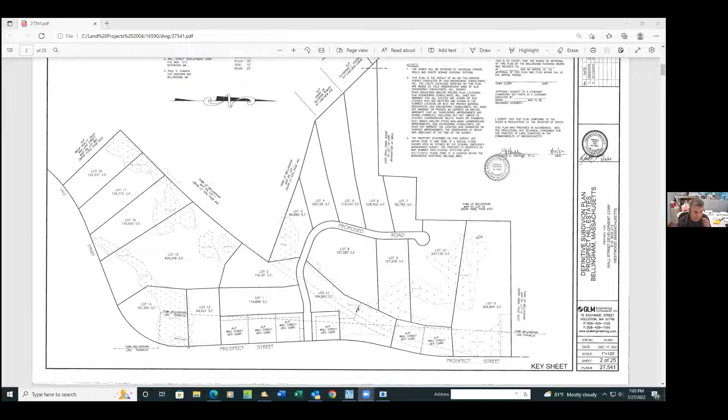So the other things that we did change, I'm just going to share my screen. Sure, if you don't... I've got so many screens open right now. Okay, everyone see that? Just the overview of the site. Yes. Okay, so I'm going to scroll down.

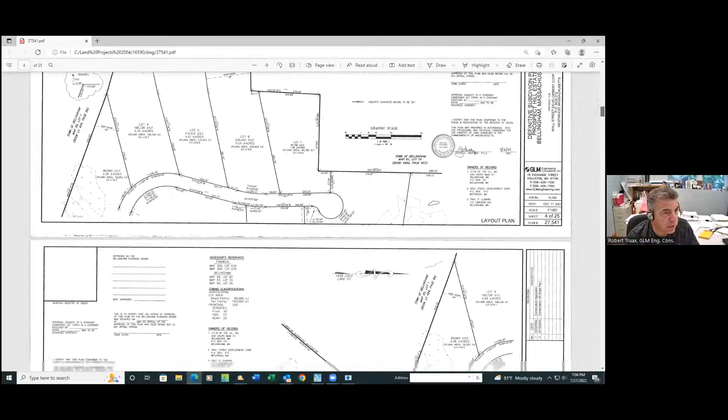Paul McManus has been out to the site, and I'm going to let him speak when I'm done. He's done some reflagging, and one area that we did not represent, I'm going to go to the larger scale plans. So we gave you some existing condition plans in this revision, at 40 scale. You can see here, this is the wetland area in the middle. The roadway goes through this existing cart path once we get done.

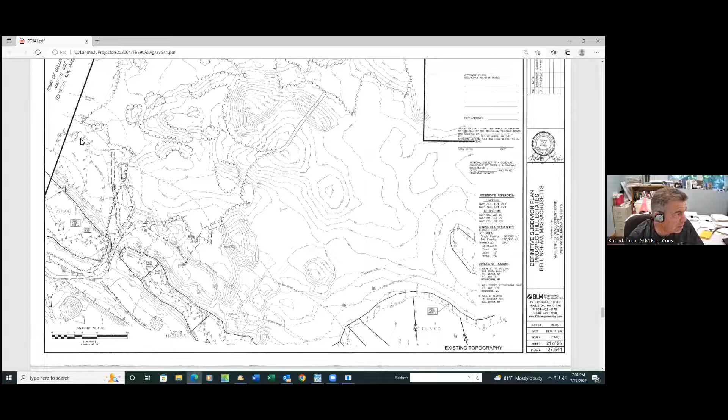So there's been a reflagging of the riverbank by Paul McManus. And there's also been, let me go this way, an isolated wetland on the other side that was not identified in the first filing. As you can see, this would show up on lot 3. And within that isolated wetland, he identified a vernal pool area, which shows up when you get into the lotting layout.

You get into this lot 3 area, and you can see this vernal pool. Pretty much we took the house location off of lot 3. That would no longer be buildable under the local bylaw for uplands. This is just a 40 scale, showing the drainage basins being pulled back outside the 50-foot buffers. That's pretty much an overview of the changes. It really pertained to the drainage system and the upland areas.

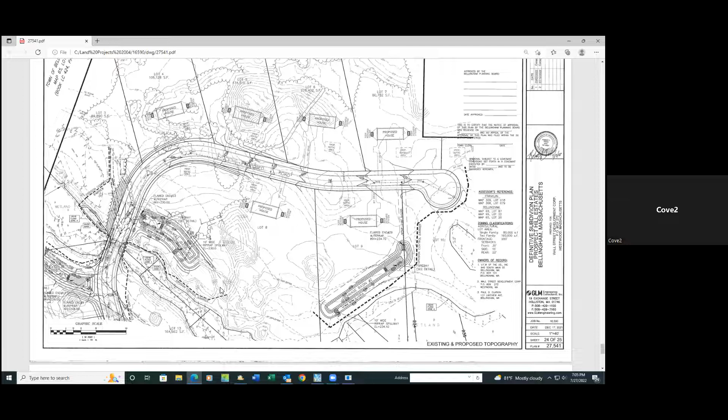Okay Rob, I have several observations. Drainage basin number 2: the basin bottom is exactly 50 feet from the resource area line, but grading is within the 25 to 50-foot limited disturbance zone. So that's one thing.

The second thing is basin number 1. When we were out in the field, I very clearly suggested that basin be moved out of the inner riparian zone. As everybody well knows, and Paul will confirm, if there's a viable alternative, there's no need to put a drainage structure in the inner riparian zone. In the outer riparian zone, it is acceptable. We talked about it in the field, and the inner riparian zone goes right through the basin.

But before we even get to that point, I'd like to speak about the alternative analysis and the comments that DEP made, because the commission is going to have to make a decision relative to the crossing. Do you have your alternatives available, Rob? I didn't prepare the alternative. Does Paul have them? Who prepared the alternatives analysis? Did Paul provide them?

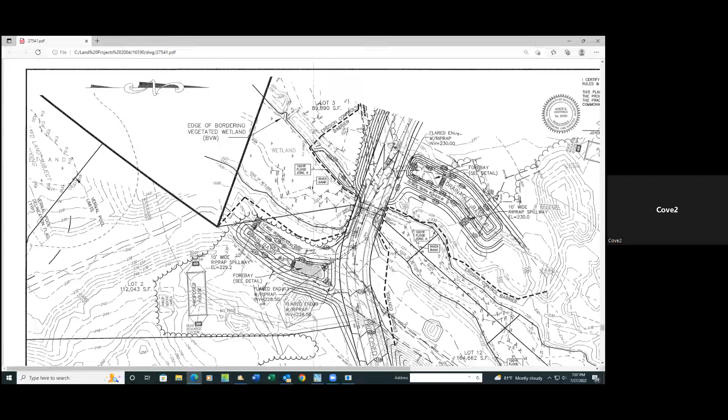I prepared them, Mr. Chairman. I'm sorry, Lou Petrosi, I prepared the alternatives analysis. Okay, so do you have alternative one available? I do not. Let me see... I'm sure everyone here is familiar with the DEP file number issuance document, and they talk about the use of the two-entrance cul-de-sac design alternative, which negates the need for the wetland crossing.

Now, one of the things that I notice is that the bank has been reflagged. And the reason the bank has been reflagged is because, at your direction, the resource area was altered by removal of an impediment to an old drainage structure. That's a separate issue, but I think the commission would consider that an unpermitted alteration by lowering the water level. Well, we would disagree, Mr. Chairman. I'm sorry? We would disagree with that opinion.

On what grounds? It's an existing culvert that was clogged and causing flooding onto the property. Was it clogged recently? It's been clogged for a very long time, so it was an existing condition. We don't, Mr. Chairman, I don't want to argue the point at this point.

Well, it's a clogged culvert. If you don't want to recognize it as a clogged culvert and you think it's an unauthorized activity, we can do that exercise if you want. But in our opinion, the culvert was clogged. It was causing a backup of water onto the upland portion of the property, and it was removed. The obstruction was removed, and the water is flowing freely as it should have been.

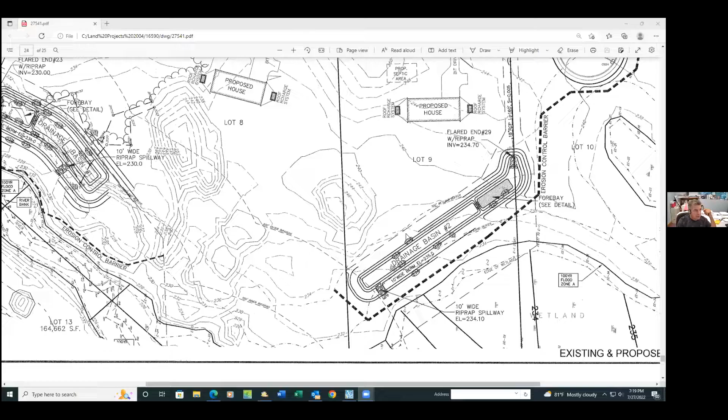Are you putting it back up, Rob? I will, yeah, hold on. Okay, I'm gonna zoom in on it. Right, there you go. So the basin bottom is exactly 50 feet, but I think the 50-foot buffer zone is into the grading. So the 50-foot buffer goes right to the top elevation right here.

See it? Oh my God. So the external. So it's in the berm. Right. It's in the berm, absolutely. Right. And so in order not to get into mitigation for alterations to the 25 to 50-foot limited disturbance zone, you could just shift that portion of the basin, the grading outside the 50, and you'd be okay.

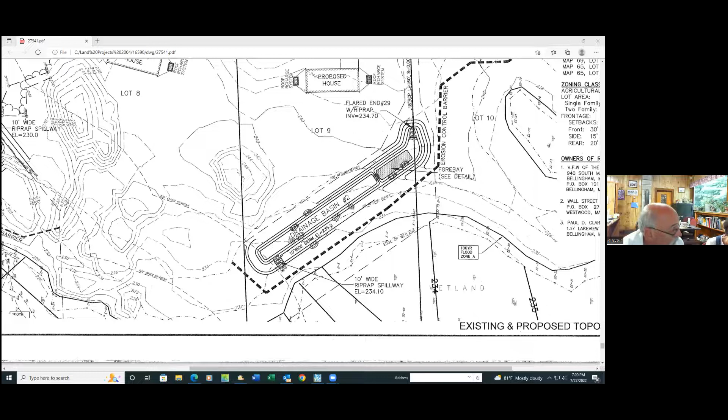Oh, that's under the local bylaw? Yes, it is. There's a 25-foot no disturb zone, and then there's the 25 to 50-foot limited disturbance zone for which mitigation is required. Okay, and yeah, I can probably shift that. Simple enough. If you do that, then you're okay.

In basin one, when we were out in the field, we talked about the fact that you have room to move that basin entirely out of the inner riparian zone. And there it is, right there. Yeah, I'm looking at it, I'm trying to find it through the base with a lot of lines. So it goes right here. You moved it so that the basin bottom was 50 feet away from the resource area, but it's still within the inner riparian zone. And it has to be in the outer riparian zone, if we go that route.

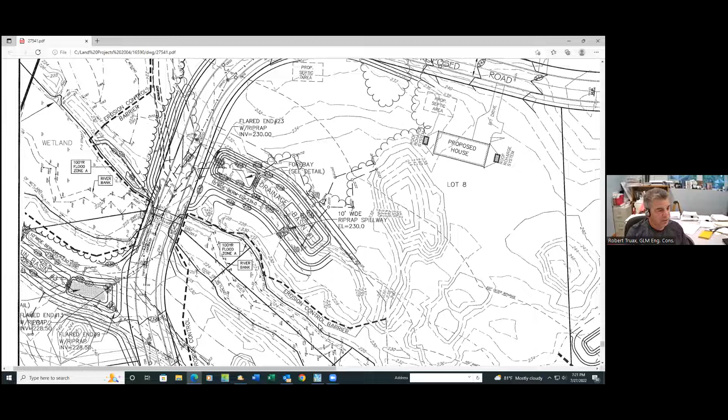Okay. Well, we can look at that option. I don't recall taking it out of the 100-foot. I just recall coming out of the 50. I know we had some conversations about it. I just didn't remember that. I'm sorry. Well, you know, those conversations are in the field. They're not part of the public record. Yeah, I did know, I just didn't remember it. I probably would have pushed it over had I remembered.

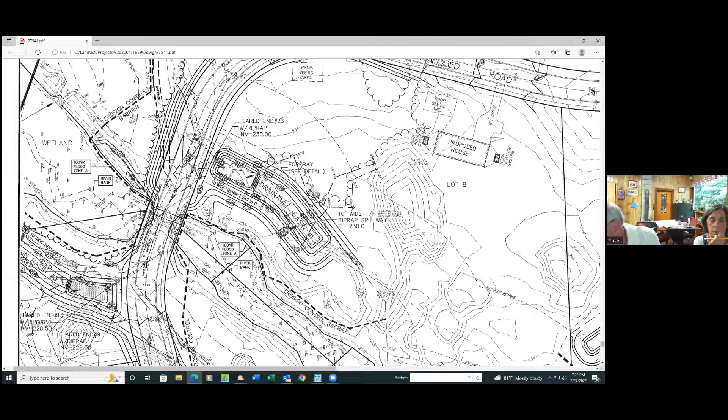Okay. I think those are just the commission's observations. Obviously, we'll have to wait and see what the result of your evaluation is. And we will have our environmental peer reviewer present at the next continuation. And we can further discuss what we saw at the crossing site and the removal of that impediment.

Mr. Chairman, I have one question. Sure. I don't know if the commission received my letter earlier yesterday regarding the stormwater requirements for 4 feet of separation from the bottom of the basin to high groundwater. Yes. It seems to me, based on the regulations, that we're entitled to the exemption that's provided in that portion of the regulations. Can you explain what your position is relative to that? Certainly.

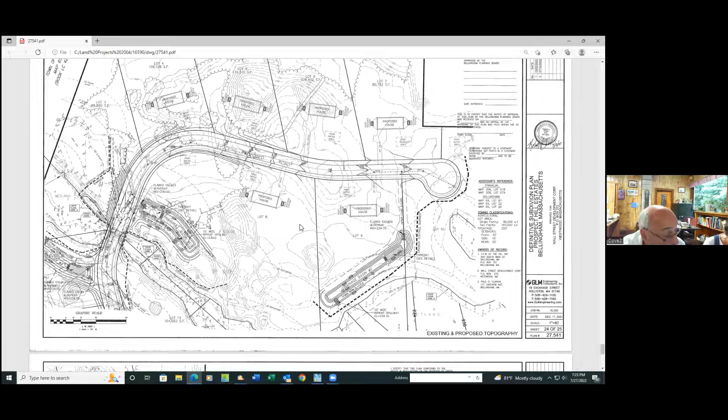When the regulations were promulgated, the commission's consideration was that smaller, denser subdivisions created more concentrated water. And when lots were developed that were over 2 acres in size, that water was easily infiltrated on the individual lots, and that more closely approximated groundwater recharge similarities to pre-development conditions. I'm sure Paul will agree with us. So we put in that exemption in anticipation that if someone wanted to create a subdivision with larger lots, they wouldn't have to deal with the 4-foot separation to groundwater in the water resource district.

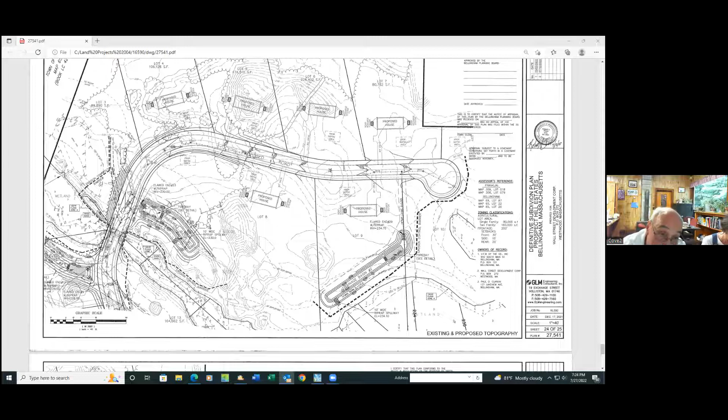So I see this subdivision as being exempt from the 4-foot separation requirement, and we're only required to have 2 feet of separation. Would you agree with that position? I think that's what I just said. Okay, so the design that Rob has proposed with 4 feet of separation is probably not required in this subdivision. And that may allow him some wiggle room if we get to the point where we need to shift the basin.

Well, we are going to need to shift the basin. It may give him a little more wiggle room to do that if we get there. Okay, yeah, so we're on the same page then, basically, on that particular issue. Okay, thank you.

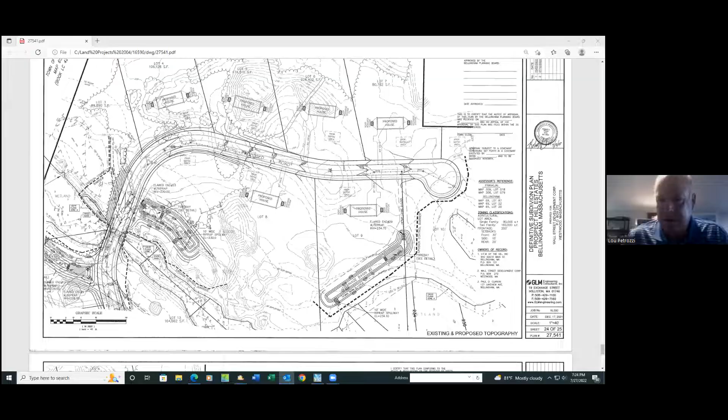Paul, do you have any comments? Well, no, I'm going to ask if there are any questions or comments from the commission on this. Okay, Mr. Chair, I have a question on the stormwater report, just a clarification. Let me call it up, hang on a second. So page 4, and then again on page 5, and I didn't get through all 201 pages. I just have too many other things going on in my life to read through it all yet, but they use the same term. I'm just not familiar with it.

The section talking about the existing conditions overview on page 3 refers to the existing site being divided into 11 existing watershed subcatchment areas to provide a comprehensive review of surface flows to the surrounding area. Then this is the section I'm questioning: see the attached pre-development subcatchment area plan for delineations with associated reaches, ponds, and design point links. And that term reaches is used in the next page too. What is a drainage reaches, drainage recharge basin, or a reaches, comma, ponds design point?

What's a reaches? Anybody else see what I'm talking about, or is that a typo? Is it a term I'm just not familiar with? REACHES. It's used at least twice in those 2 pages. Like I said, I didn't read through the whole thing. Essentially, he's asking what a reach is. A reach is an area that's close to a design point that accepts flow from another area. I think Rob will.

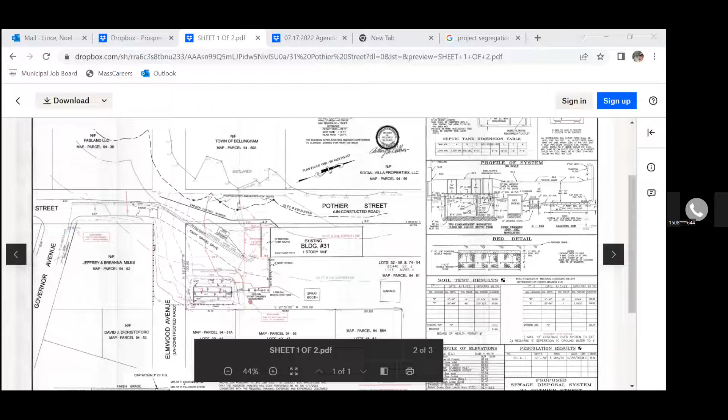Of course, we have revised dates on the plans. The offset to the recharge area is about 52 feet. The new recharge area, it's roughly in the same place, it's just a little bigger. Excuse me, Paul. You didn't distribute it, did you? I did. Oh, okay. Does anyone have availability to put that plan up on the screen? Yeah, I'm working on it right now. 1 second. Thank you, Noel. I didn't mean to interrupt you, Paul. It'd just be easier if we can see what you're talking about. He won't be able to see it, but it'll make it easier for the commission. Yeah, no, I fully understand. Okay, very good. Thank you.

Thank you, Noel. I was trying to do that with my cursor and it wasn't working. All right. So again, the only changes on the actual plan itself: the addition's the same, the tear down section's the same, the septic system's the same. The only thing that's actually changed is the new recharge area that Dan designed and just moving the water line a little bit away from it, which goes a little further away from the wetlands. And that's the only changes to the plan other than, of course, the revision date. The package you got from Dan has all the drainage information, the checklist that DEP wanted is in there. All that stuff is in that package that you received. And I know you haven't had a chance to look at it yet.

Paul, did you send the revised materials to DEP? Yes, we did. Okay. Thank you. We sent them a copy of the plan and that report that Dan did. Okay. So I'm going to ask the commission to take a look at the revised plan and look at the revised drainage calculations, especially with the stormwater checklist. And if anyone has any comments or questions, if you'll let Noel know, she can pass it on to Paul. And with any kind of luck, we can get it taken care of before the next hearing.

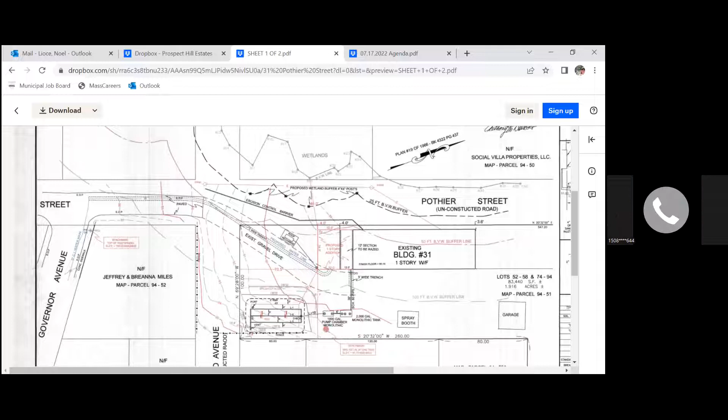All right, thanks, guys. Paul, thanks a lot. All right, take care. We'll see you in a couple of weeks. Thanks, Bob. All righty, thanks. Okay. All right, bye. You need anything signed? No. Yeah, yeah, right. Okay. We got those, don't we?

Help me out. Did we get the minutes for June 8th out? Yes, I think we did. I remember working on them. We only got the ones for the 8th, I think, correct? The 8th, right? Yeah, okay. The 22nd hasn't been reviewed yet. Okay. So any questions from the commission on the minutes of the 8th? Okay. Hearing none and seeing none, I'll entertain a motion to accept the meeting minutes from Wednesday, June 8th. So moved. I second. Okay. We won't do a roll call. All in favor? Aye. Aye. Aye. Okay, there it is. That's a unanimous vote. Okay.

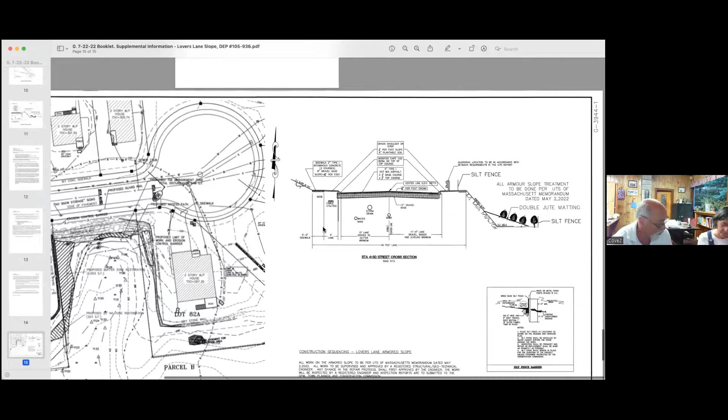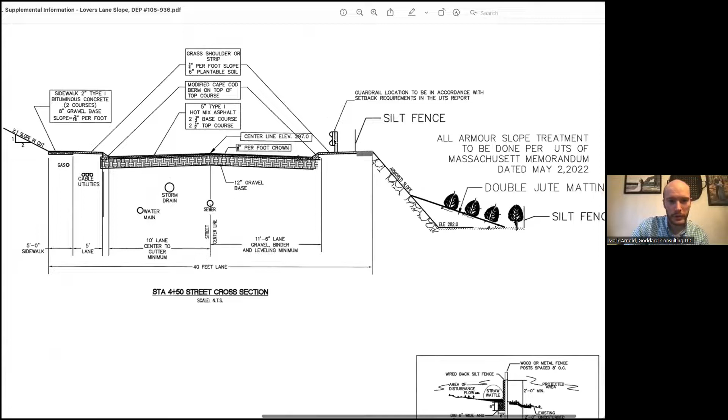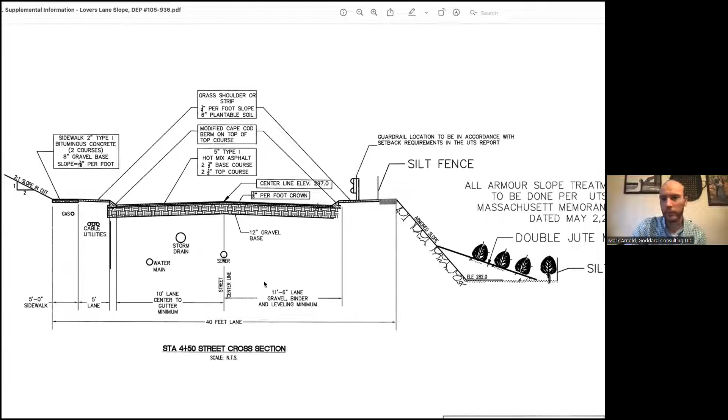So here's the, this was stamped July 21st, 2022. Here is the cross section. So basically, again, the only thing behind this wall is a filled slope, and you have sewer, drain, water, utilities and gas. Okay. So that's basically it. So it's all basically compacted gravel fill when they raised this road to grade.

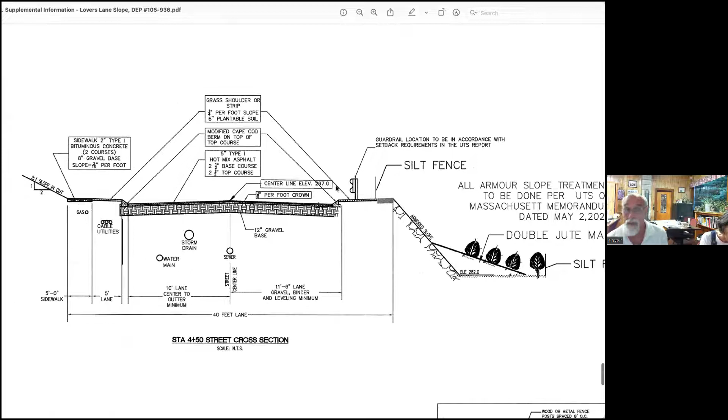Okay, no, that's it. That's good. And then if you go over here, you can see the no snow storage signs, 3 of them across the slope, right behind the guardrail. Okay.

So continuing on, the other comments were mainly comments directed at UTS, which they did address in their letter, which they were amenable to insofar that they were fine with doing monitoring, which included X, Y, and Z points traversed, surveyed for several years to ensure that there was no movement of the wall. And then they did list out that fill was going to be placed at 1 foot lifts for the toe embedment. This is standard Massachusetts DPW common borrow fill material.

So it's good material to backfill and compact to get 92% compaction, which is what's required. Testing every lift, which is every 12 inches, there'll be a compaction test to ensure compaction is correct. And UTS will be out there doing testing and regular inspections for all the work as we've previously noted, but that is our intention. And we can provide the information to the commission about the inspections and the survey to document that the slope is not moving. I can go into further details, but that's in general what UTS has provided in writing.

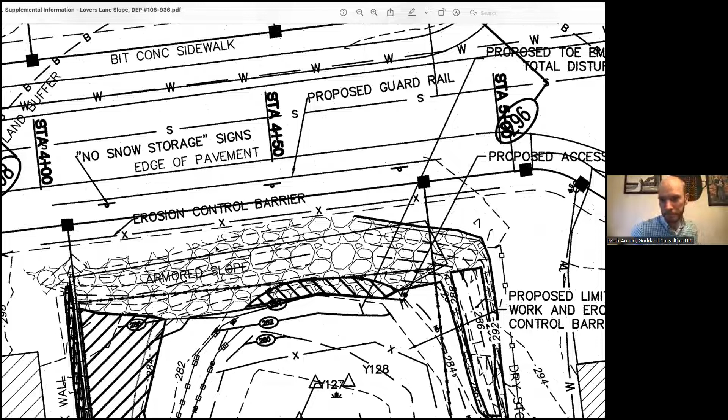Okay. So if we look at your response 8C. Yep. Okay, when we have restoration or planting enhancements as mitigation, you're correct, we always require a 3-year monitoring period. We're okay with that, but we also have a bond established. And we're going to request that you suggest a value of that bond to assure that A, the work is complete, and B, if you or others are not available and we have plant mortality, they can be replaced. Standard procedure.

Okay. So let me think about that and check current plant pricing. Okay, we figured that you would know. Yeah, I could give you an idea now, but I want to check current plant pricing considering the current price of things. Please make sure that your estimate does not include any cents in it, like 95 cents. Will do. Thanks.

Okay, the other thing is I believe that all this information has been submitted to the DPW. Have they been on the distribution list, Mark? Do you know? I think they tried to, I've been sending Don DiMartino the information. I don't think he has received this information though, because we were on vacation. Yeah, I didn't send it directly to him. I wasn't asked to directly do that.

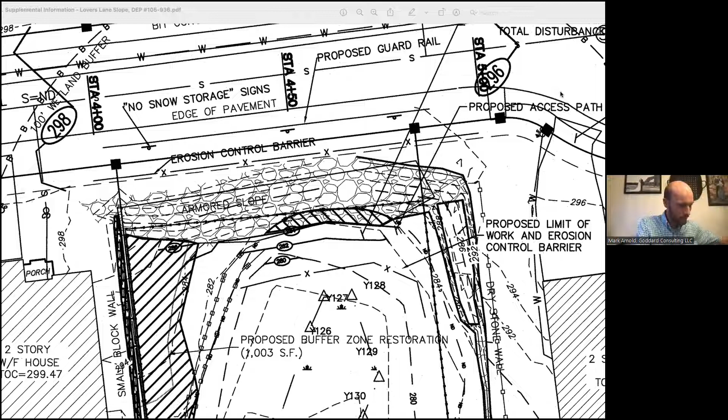That sounds good. And let's see now. This is what we did this weekend, getting back from vacation. So UTS, I think I had one thing in their information. Okay. Page 7 in the UTS report. Yep. It says additional comments to address our review.

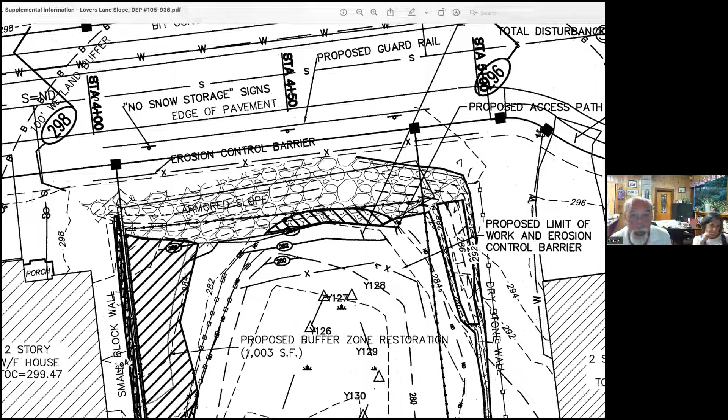First bulleted item, the armored slope is constructed to elevate the roadway and to provide stabilization to a steep slope embankment. The embankment will be dry with no exposure to groundwater. Further, the top of the slope will be paved with perimeter curbing and a storm drain system to collect and capture the water. Is that the area on the roadway within the Cape Cod berm that he's referring to? Yes. Okay. And then he says, lastly, a subsurface drain is to be installed to collect any possible water. And I didn't see that on the plans.

Yeah, that might have been from the last plan revision when we were contemplating putting on a subsurface drain, and decided not to because of the way we have everything graded right now. You don't think that that's... No, that's not the intention to do a subsurface drain, because we have a fill slope here where the groundwater was well below the slope of this wall when it was raised up. There's no natural groundwater that's going to be coming through that wall. Okay, and so the subsurface drain isn't going to be required.

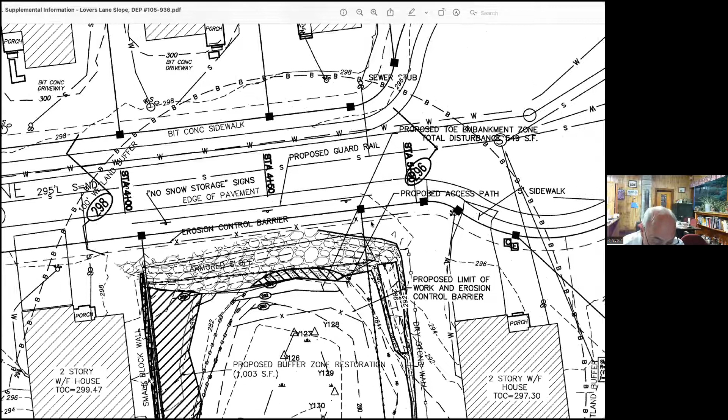I didn't recall that it was going to be a requirement, but I'm going to ask that you just eliminate that from this, because this is going to be referred to in the plans as part of the plans of record. Understood. And I think that was the only questions the commission had. However, I will say that the report appeared to be thorough, and that many of the items in this report anticipate our special conditions. So that's helpful. We may just steal your language instead of trying to make it up as we go along. That's fine. Okay.

All right. Does anyone from the commission have a question or comment? Dominic, any observations? I know we haven't received anything official. I'm thinking it's going to be forthcoming. If there's anything that the commission may have missed, please let us know and we can instruct the applicant to address it. Good evening, Mr. Chairman. For the record, Dominic Rinaldi with BSC Group, peer reviewer for the commission. I was happy to see, particularly on the UTS side, a lot of the revisions they made to address our comments and being amenable to the post-construction monitoring. And that portion of it can certainly, if the commission is amenable, be a special condition for the project to detail that monitoring.

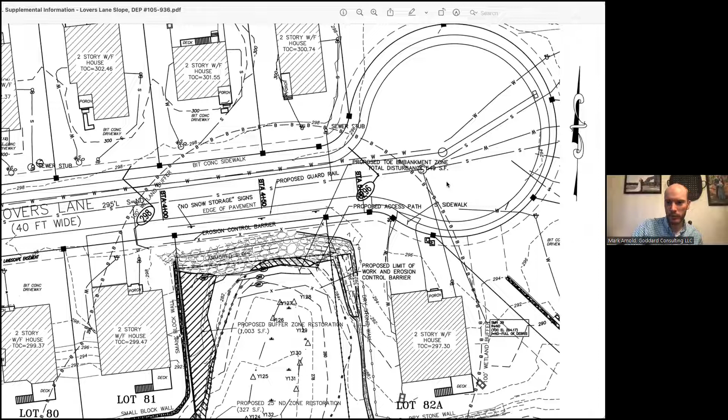Mr. Chairman, I just want to clarify and confirm that we're going to resubmit the UTS letter, and the sentence "Lastly, a subsurface drain is to be installed to collect any possible groundwater" will be struck from that letter. Yep. We'll get that to you as soon as possible. Otherwise, we will look forward to hearing from DPW and getting BSC's official letter. Right. Oh, and also, I know that it is in the plans, but the catch basin that shows on the UTS letter... Yeah, I'll get that updated to you. Yep, have them blank that out. Yep. Okay.